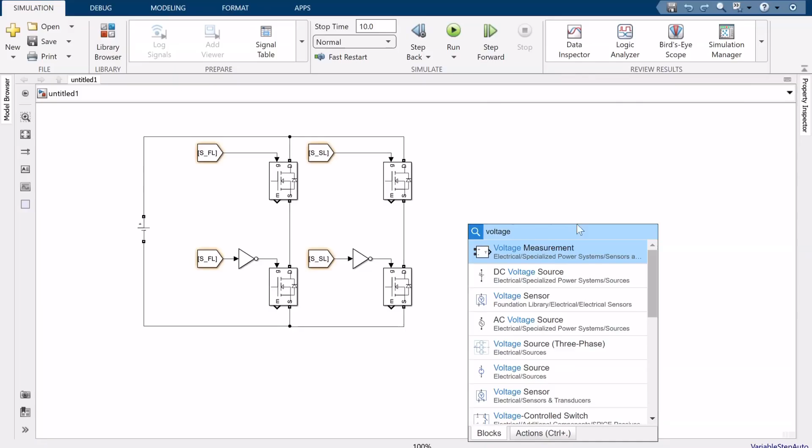So I've already made the full bridge, because that is not important. I just haven't added the voltage source, so we can add the voltage measurement right away. So we have one measurement here, and then one measurement here. And then we can add a scope. Okay, and then we can make the control circuit. So you can see that it looks like this.

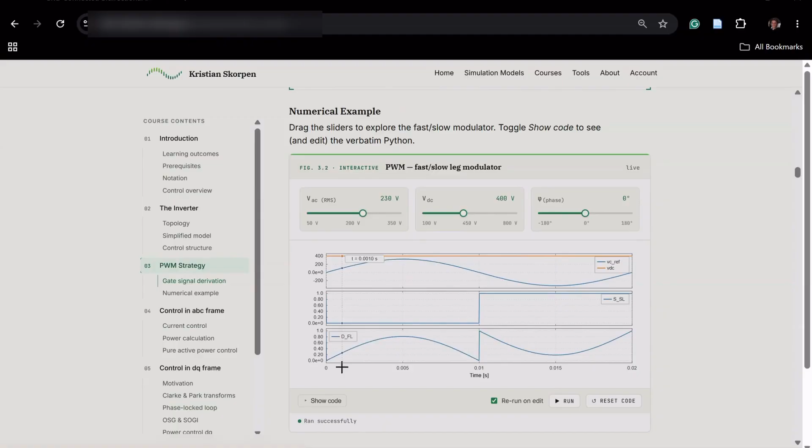So the basic idea is that we want the slow leg to switch like this, so only once during one period of the voltage, and then the fast leg switches very fast. So this is just the duty cycle, so it switches a lot faster, and it should look like this. And this block diagram just decides the two gate signals based on the reference voltage that we want on the output of the inverter. So we can go ahead and make this one.

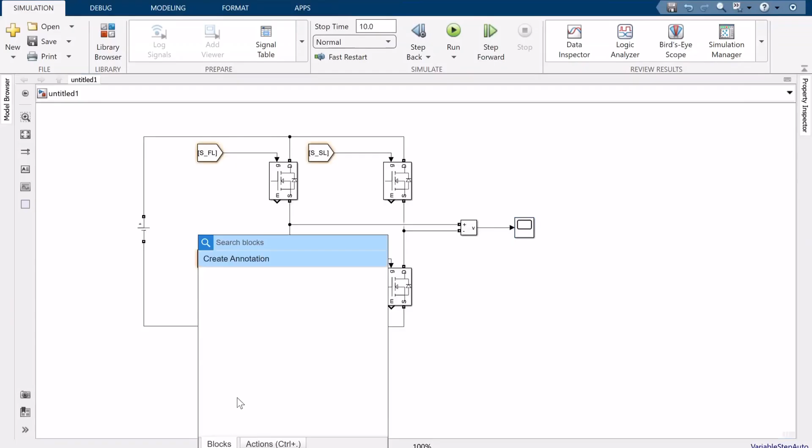So I think it's simplest to make the slow leg first. So that is just a comparator between the voltage reference and zero. So, we can go here. So we first can define a voltage reference. So that is just a sinusoidal signal. And I've already predefined a voltage reference, which is called Vref. And then we can just multiply it with the square root of 2.

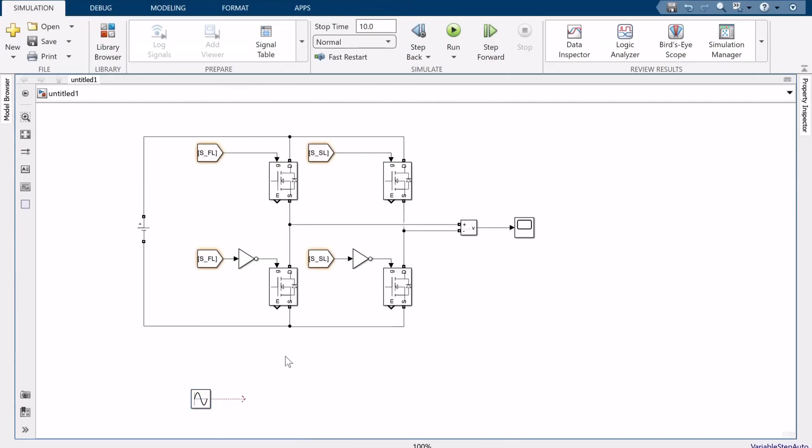And then we also want to change the frequency. So the frequency is in rads, and this one is in hertz. So we want to multiply with 2 pi as well. So then we have the voltage reference. Then we can connect that to a relational operator in order to compare it to 0. So let's add a const and make that 0. So then we basically have the slow leg.

So what you can see from the slow leg is that when the voltage is above 0, then the slow leg is 0. And when it's below 0, then we get 1 for the slow leg. So we can just add this directly into the slow leg. And then we want to make the fast leg. So here we want to first find the duty cycle. So if you look at here, you can see that it's basically this one divided by the input voltage, which is VDC. And then we add the slow leg as well.

So then I just add a constant. But ideally, you should just measure this voltage. So then we have Vin is what I predefined, so it's 400. And then we need a divide block. So here we have normally the duty cycle, but then we want to change it so that we can use it here. So then we need a sum to add the slow leg. So there we have the duty cycle. So this should be the duty cycle, and this is the reference. I can just write that, Vref.

And then we want to have a PWM, because now we have the duty cycle, right? So we have D, but we want the PWM. So then we need another relational operator. So we can just use what we had here. And then we want to compare it with a triangular waveform, which is a repeating sequence, I think. Yeah, here we can define a triangular waveform. So that is just how you make a quick PWM. So I have already defined a switching frequency. So after half a period of the switching frequency, we want a number, and then after one period.

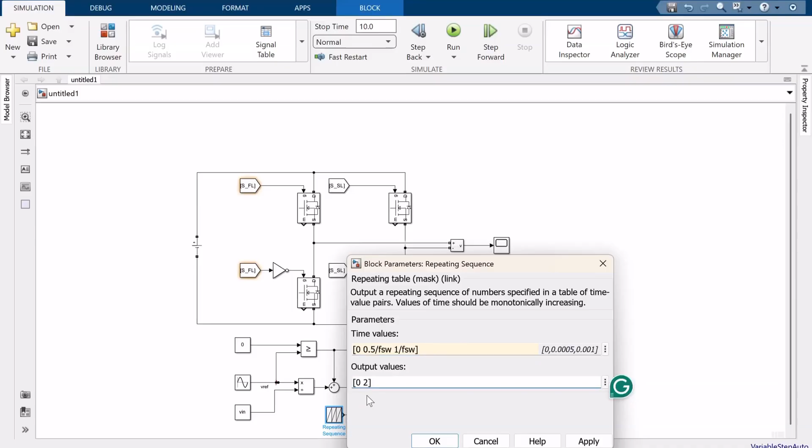So after half a period, we want it to go up to 1. And after one period, we want to go back to 0 again. So then we get a triangular waveform. And this is basically the fast leg that we want. So if we try to run it now, it should work.

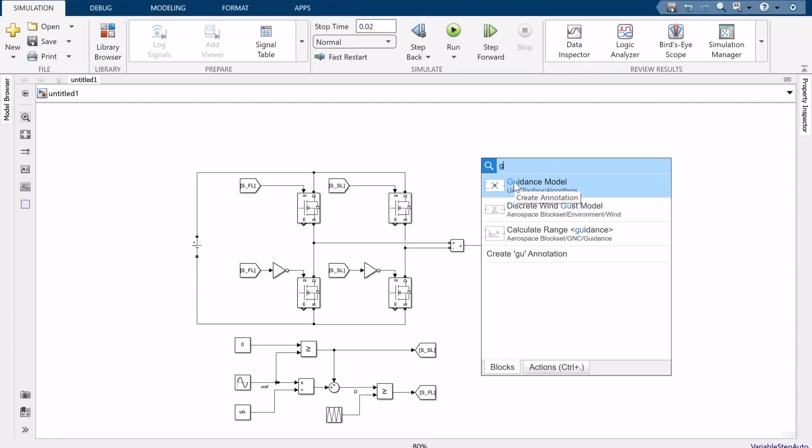Well, we can reduce this amount of time, and we also need a solver. So we can add a solver. I think it's called powergui or something. Yeah, there it is. And I want to change it to discrete time. I think that is better. And then just add 1 microsecond in step time. And let's see how it works.

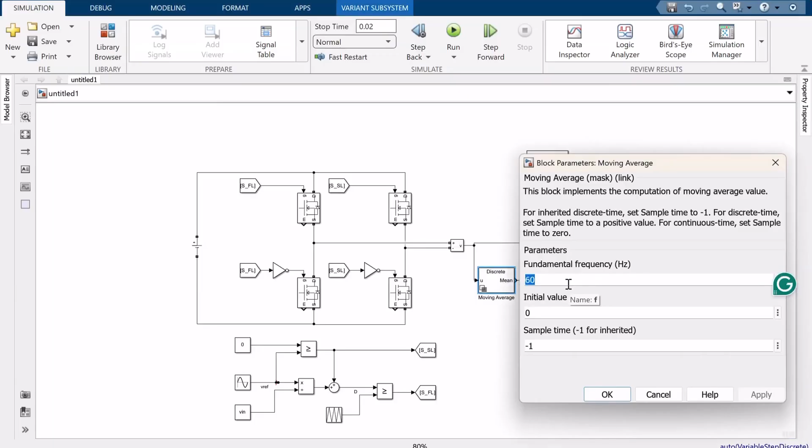So now it's finished, and you can see that we get the behavior that we want. So if you imagine on average, it would be something like that, right? So then we can actually try to take the average of this to have a look. So I think we can add a moving average, and then add that into here. So we want a quite high frequency here. So let's say 2 times the switching frequency. So let's have a look now.

Yeah, now you can see that we get more of a sinusoidal shape, but I think we should add another moving average. A double moving average would make it better. So this is not something that you would do in the real world, but it is nice to use average filters to analyze what we have. So then you can see that it's even better. You can see it's more sinusoidal.

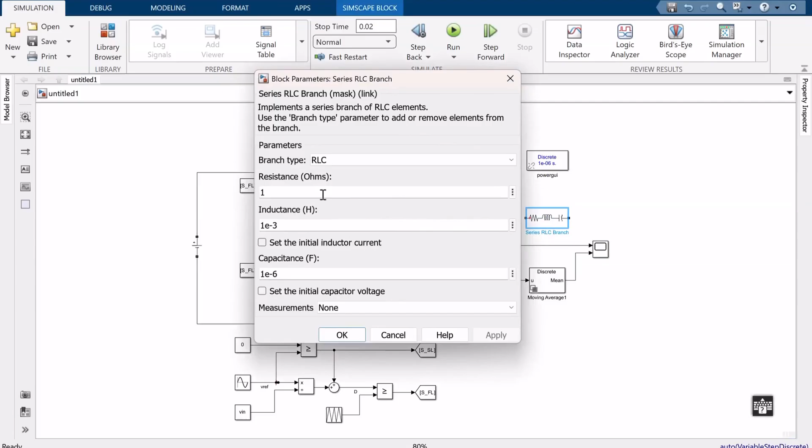Okay, so what you actually want to do is to add an LC filter. So we can do that really quickly here. So we can first add an inductor, and it's called RLC branch, I think. Yeah. So here we have a branch, and then we want to convert this into an inductor. So 1 millihenry is okay, and then connect it to the output of the fast leg. Then we want a capacitor, and I think this should be higher. So let's say 100 micro. And then we can connect this here.

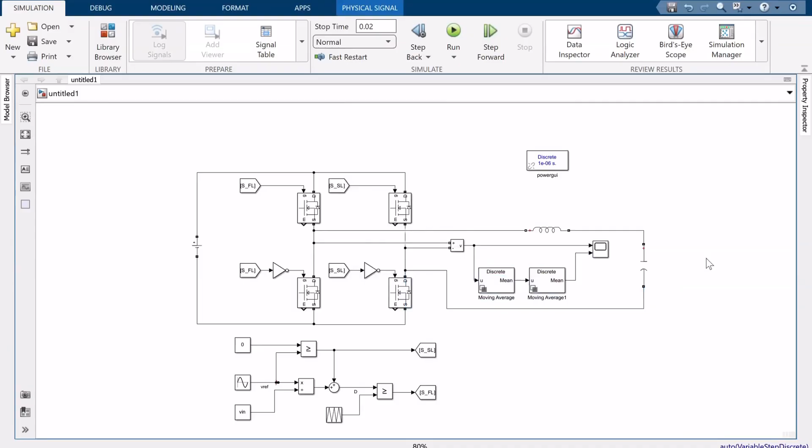And in order for this filter to work, we need a load. So we can just duplicate this and make a load. So we have an LC filter with a load. So let's say, what is a nice value? Maybe 10. Now let's have a look again. So this actually shouldn't do anything to the voltage that we measured here. We should actually measure the voltage here. So I should add another measurement and then add a scope. So let's have a look how this looks now.

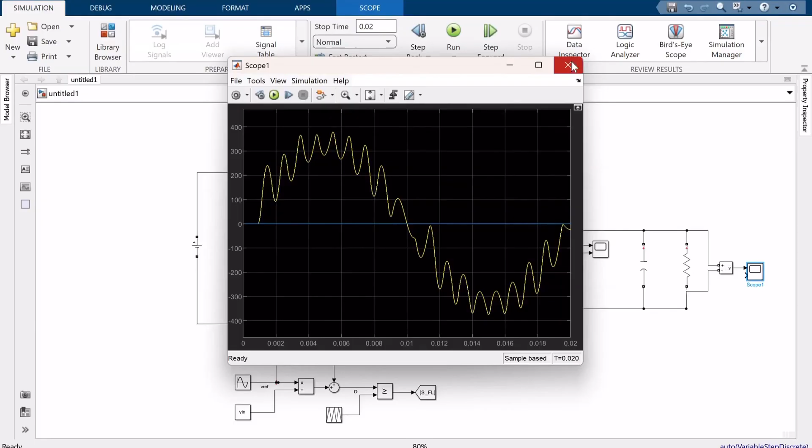So you can see that we now get more of a sinusoidal waveform with only this filter. So if you tune this filter even better, you can get better results. And also if you increase the switching frequency, you will also get better results. So I didn't really show you the switching pattern here. So I think it would be reasonable to plot the slow leg and the duty cycle. I think those are the most interesting here. So we can try to plot those two.

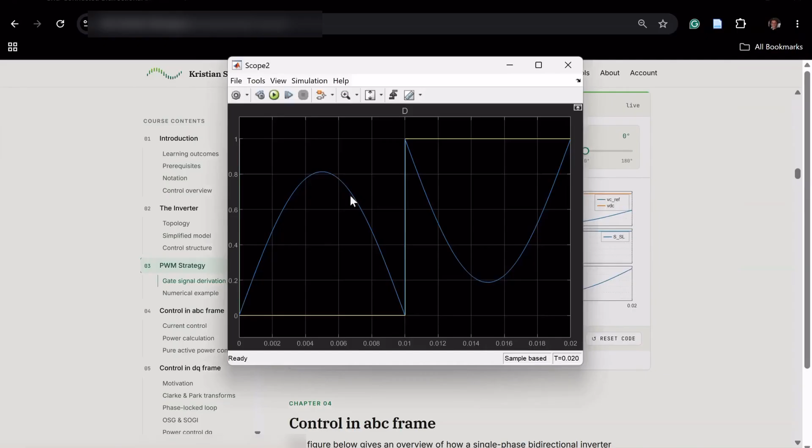Then you can see that we get the same behavior as I showed you in the beginning. So in the course that I have, we get the same behavior. So the duty cycle starts off being sinusoidal, and then it jumps up because we add the slow leg. So then it gets this waveform. So we get exactly the same thing here. So that is basically how we can make a fast slow leg PWM.